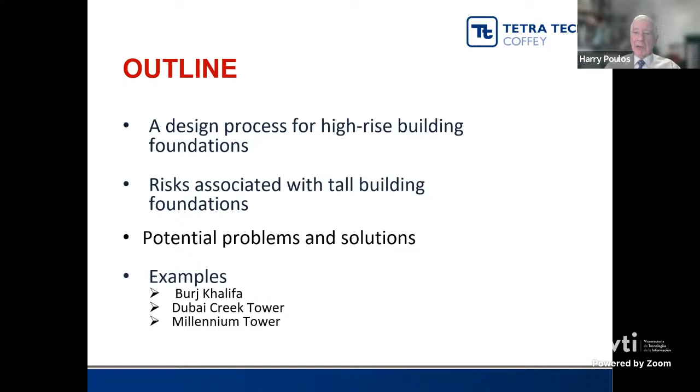The outline then is that I'll talk about the design process that we've developed. I'll talk about some of the risks associated with tall building foundations, some of the problems that we can encounter and how we can solve them. And then I'll talk fairly briefly about 3 examples: the Burj Khalifa, the Dubai Creek Tower, both of these in Dubai, and then the Millennium Tower in San Francisco.

Now, the number of tall buildings - this graph is from the Council on Tall Buildings and Urban Habitat. What it shows on the vertical axis is the number of tall buildings that have been completed, and on the horizontal axis are the years. You'll see there's been an almost consistent increase in the number of tall buildings. These are buildings, I guess, in excess of 300 meters, so these would be super tall buildings.

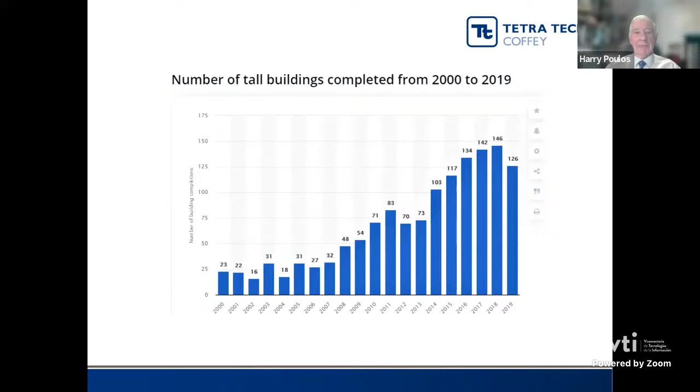There was a slight dip in 2019, but the number of tall buildings continues to increase significantly. Some aspects related to tall buildings are high vertical loads, which tend to increase non-linearly with height, because the taller the building, the more robust and heavy it has to be. We normally also have low-rise podium areas adjacent to the tall tower, so there's potential for differential settlement between the tower and the low-rise area.

We have high lateral forces and moments, and those forces and moments are cyclic in nature. We also have to design for seismic forces due to earthquakes, which give rise to two types of forces: inertial forces, caused by the building moving backwards and forwards, and kinematic forces, induced in the foundation system because the ground is moving backwards and forwards and impacting on the foundation system.

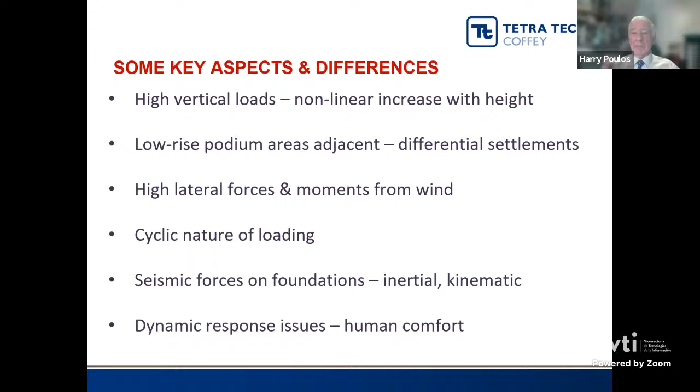We also have to make sure we design for human comfort, so we have to design the dynamic response of the structure-foundation system so that you don't have excessive movement and vibration. Now, here are some interesting aspects that make tall buildings different.

In recent times, there's been a tendency for taller towers to be located on smaller footprints. We now have a number of buildings where the aspect ratio, the ratio of height to width, is in excess of 20, whereas normally it would be 8 to 10. This has given rise to big issues with respect to lateral and overturning stability of the foundation system.

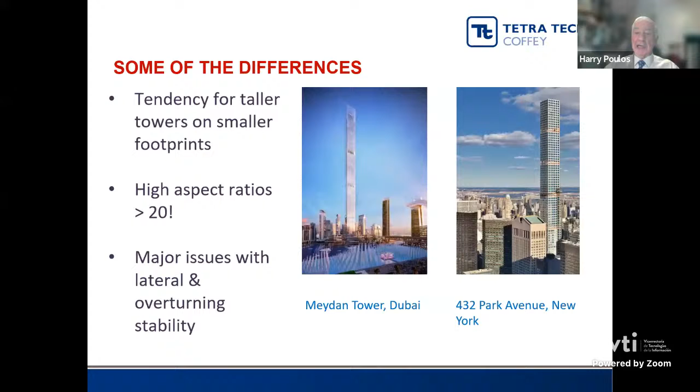The consequences of these differences between tall buildings and other foundations are that uneven settlements can be very visible, and the consequences of failure can be catastrophic. For these reasons and others, we need detailed ground investigations. Usually there are a large number of piles or barrettes involved. Load testing really needs to be done, and fortunately is now becoming quite common with major projects, and peer review is now much more common than it used to be.

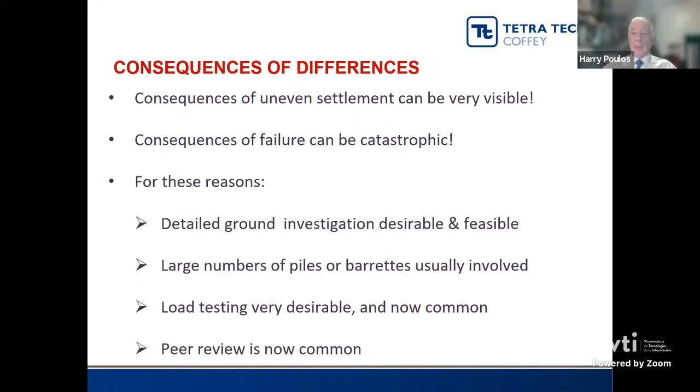Some of the ingredients for economic foundations: firstly, we have to have the right concept for the structure and the ground conditions. We have to have the right design criteria and methods of design, appropriate ground data and design parameters, quality construction, appropriate pile or foundation element testing, and ideally we need to monitor the performance of the building during and after construction so we can satisfy ourselves that what has been constructed is in accordance with our design intent.

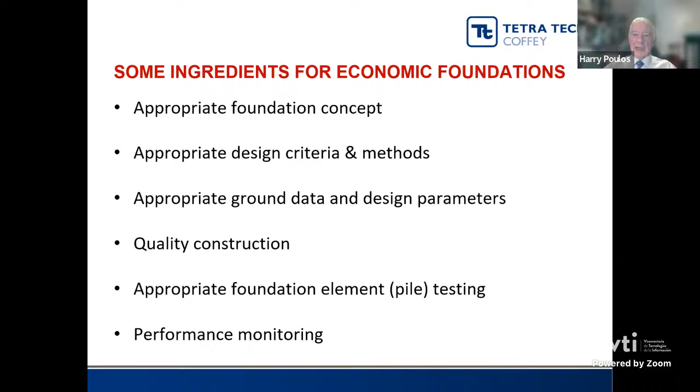We normally have three types of foundations used for tall buildings: the raft or mat foundation, suitable for buildings on good quality rock and perhaps not too tall; most tall buildings are on some form of pile foundation, either fully piled, where the piles take all the load, or, in more recent decades, the piled raft foundation, where it's recognized that the raft or basement slab can provide stiffness and resistance. This can enable us to reduce the number of piles and assist in the sustainability of the foundation system.

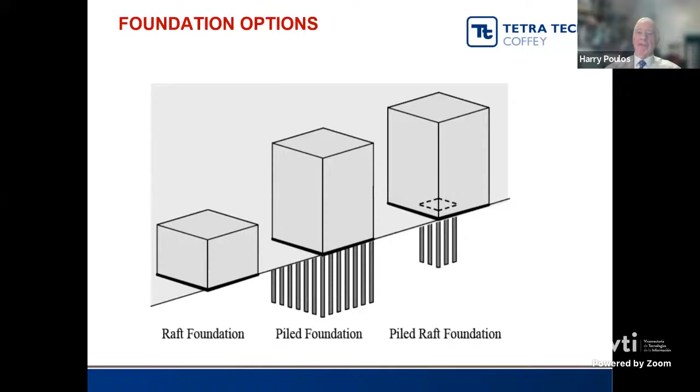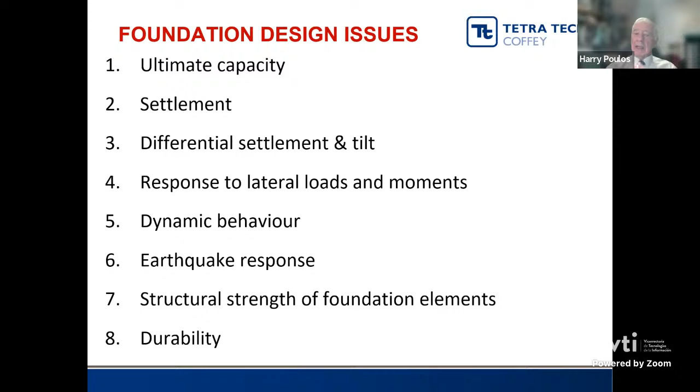The foundation design criteria we have to check for: ultimate capacity of the foundation system, settlement and differential settlement and tilt of the building, response to lateral loads and moments, dynamic behavior and earthquake response. These are geotechnical issues, but we must also be aware the foundation system has to be designed for adequate structural strength and durability. These days it's not uncommon for specifications to require the foundation system be durable for at least 100 years.

In the design process we adopt, we have three stages. The preliminary stage, the earliest stage, where we develop the foundation concept and decide the optimum type of foundation, whether a piled raft or a pile. Then we go into a detailed stage where we develop and optimize the design, and importantly interact closely with structural engineers. Then in the final stage, we do the final design, hopefully with the aid of load test data, so we can optimize and finalize our designs.

Here we also incorporate peer review considerations into that final stage. And I've got a note that the design tools we use should be consistent with the stage of design.

In other words, it's not sensible in the preliminary stage to start off the process using three-dimensional finite elements.

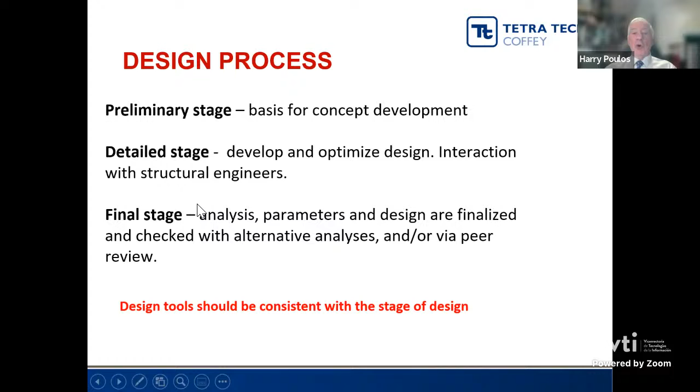Because normally we don't have enough detail of what our final foundation concept will be, nor do we generally have all the geotechnical data that you would require for a detailed analysis. That normally comes in the final stage.

So the analyses that we do then include ultimate limit state analyses, where we examine the overall stability and geotechnical capacity.

We also normally allow for cyclic loading analyses because we recognize that if there is an adequate or a large amount of cyclic loading, there is a potential for the reduction of skin friction of the piles.

And what we try to do is design the piles so that the cyclic loading will be no more than about 50% of the shaft friction capacity.

In terms of serviceability or allowable movements in settlements, typically we specify no more than 100 millimeters, although some buildings in Frankfurt, Germany have settled 150 millimeters or so without any damage.

And we try to limit the differential settlement or angular rotation to 1 in 500.

We have dynamic loading where there are requirements for human comfort, so you have vibration and frequency requirements.

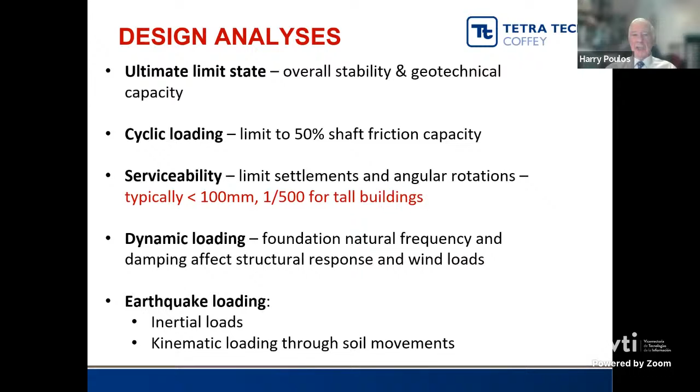And as I mentioned before, we also need to make sure that with earthquake loading, we take account of both the inertial loads due to the structure and kinematic loads through soil movements.

The geotechnical parameters, the main ones that we need to assess in our foundation design are, of course, the ultimate shaft friction and end bearing.

And if we've got a pile raft, we also need to know the ultimate bearing capacity of the raft. We need to estimate the soil stiffness or modulus for vertical loading.

Bearing in mind that for long-term dead and live loading, the modulus is generally smaller than it is for short-term loading, such as wind or seismic loading.

It's important that we distinguish between those two when looking at long-term settlements versus short-term movements due to wind loading. We need to estimate the ultimate lateral pressure so we can design the piles for lateral loading.

We also need soil stiffness or modulus values for lateral loading because they will generally be different from those for vertical loading.

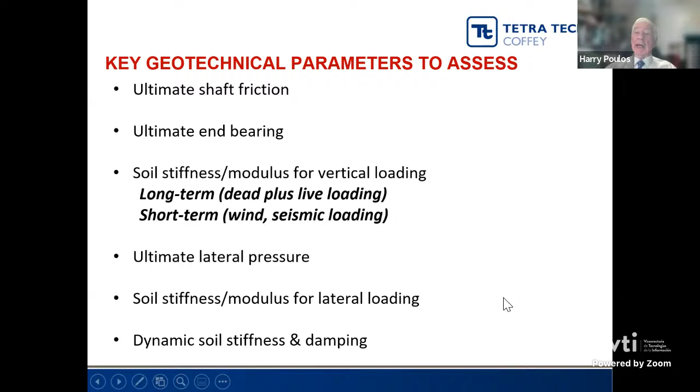And we also need to estimate dynamic soil stiffness and damping of the soil in which the foundation is located. There are a number of soil structure interaction issues.

When we do our stability calculations, we of course need to check firstly that the geotechnical resistance is adequate.

What we do here is factor down our estimated geotechnical capacity so that we make sure the factored down geotechnical capacity exceeds or equals the factored up loadings.

But we don't factor down our geotechnical resistances when we check for the structural loads in the foundation system, because that would artificially limit the amount of load that the piles can take.

We need to be aware that the stiffness of the superstructure will affect the settlement and differential settlement. This is best taken into account in the structural analysis using values of the stiffness of the piles and the raft, which we provide to the structural engineer.

Some of the software that is available commercially assumes that you have a rigid raft. That isn't always a good assumption for tall buildings, particularly buildings that are 50 or 60 meters in extent.

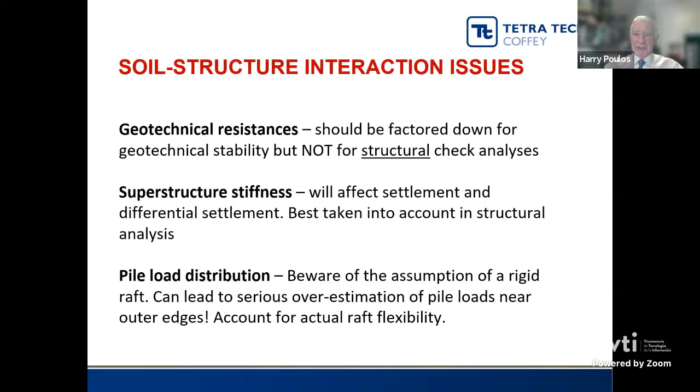Because even fairly thick rafts, as I'll show you later, can be relatively flexible over those sorts of distances.

It's important then that we have cooperation between structural and geotechnical designers. That is essential for a successful outcome.

One of the key geotechnical outputs that we as geotechnical designers provide to the structural engineer are values of the pile stiffness, the axial, lateral, and rotational stiffness for each pile within the group.

These stiffness values must take into account the fact that you have interaction between the piles in the group, and that affects the stiffness of the piles as compared with a single isolated pile.

Those values that we provide to our structural designers are then incorporated into their analysis to obtain structural design actions or loads.

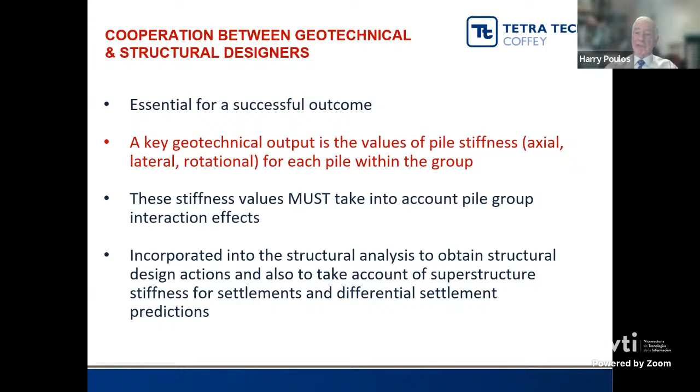And that takes into account also the effects of superstructure stiffness and allows us to get a more accurate assessment of settlements and differential settlements. So that's the design process.

Now, in reality, we have a number of risk factors in foundation design. It's possible, and has unfortunately been the case in many past projects, that we do inadequate investigation, and so we finish up with an inappropriate ground model.

We also may have to contend with the reality that geology provides what I call imperfections. These are non-ideal conditions. For example, we may have a softer layer below the tips of the piles. We may have sloping bedrock or uneven thickness of layers. We may have boulders. And then in terms of the construction process itself, there may be problems or imperfections or deficiencies in that construction process.

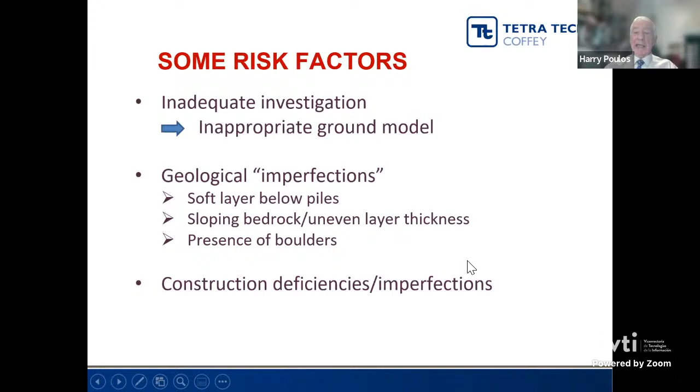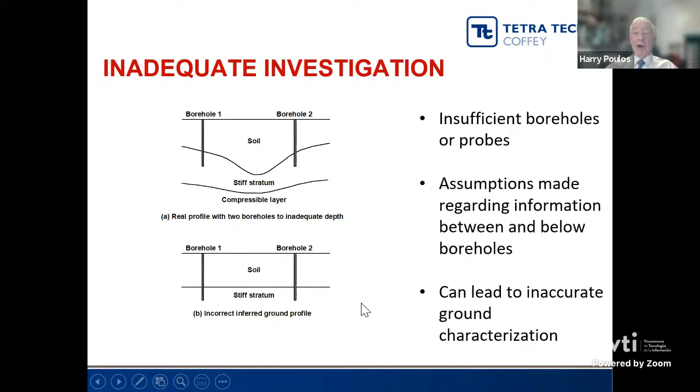So just very briefly to illustrate some of these risk factors, here's a hypothetical situation where we put down two boreholes and we think that those boreholes show that there is a horizontal soil layer with a stiff stratum underneath. But what we miss here are two important factors. One is that there may have been an old riverbed in between, and so we miss that out. And if our boreholes don't go deep enough, we miss the fact that there is a compressible stratum below that stiff stratum. So that can lead to a very simplified and incorrect ground profile, which can in turn lead to problems with our foundation. We'll talk about that towards the end of the lecture.

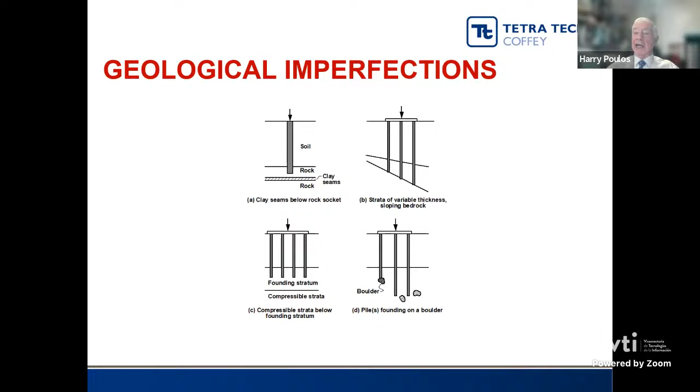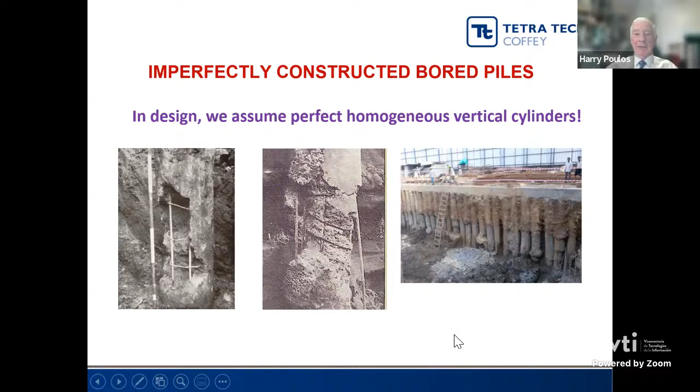And of course, we can have imperfect construction. Here are some unfortunate examples of bored piles, which are very imperfect, as you can see. And here are piles that are not very attractive because they're not what we assume in design, which is, in design, we assume that the piles are perfectly homogeneous vertical cylinders. And in reality, that is certainly not the case here.

So what are the consequences of those imperfections? Well, in terms of the design issues, if we've got a situation where we have uneven settlements, we need to try and correct the settlements to reduce the differential settlements. And we have two classes of methods, hard and soft methods. I'll describe those in a minute.

We then need to design remedial or enhancement works so that we increase the resistance of the foundation system. And we need to be aware of the load sharing between old and new elements.

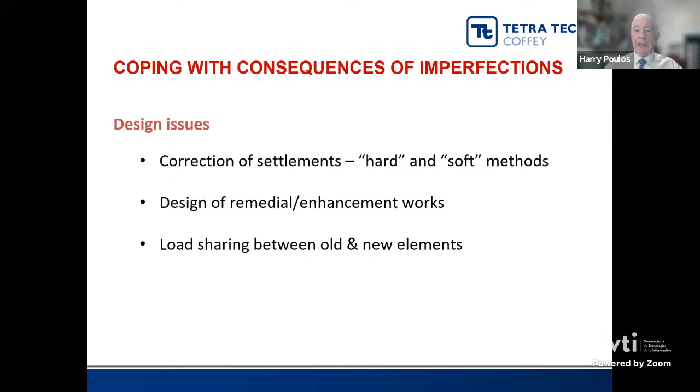Now, I mentioned methods of correcting uneven settlements. Here we have some of the hard methods. These are methods where we actually do put force on the foundation system or the building to try and correct the uneven settlement. We can use anchor stressing or additional loading on the high side to try and get the high side to settle more. We can try cutting the piles, but that generally isn't that effective, and it's a bit of a terrible process.

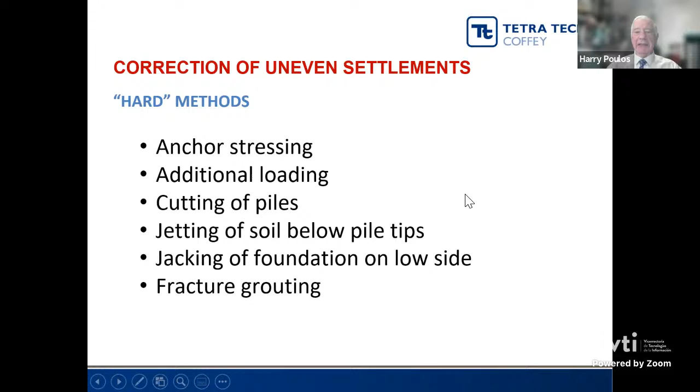We can try jetting the soil below the pile tips. We can try jacking the foundation on the low side to jack it up, but that isn't always effective, because as you jack up, you also, because of Newton's law, have a force that goes down, so that may not be effective. And also, one of the other methods that has been used is fracture grouting to try and jack up the low side, but that is also not a very controlled process.

We have then what I call the soft methods, which basically involve doing something to the soil rather than to the structure. So we have the possibility of doing soil extraction, so we remove some of the soil from the high side to try and induce extra settlement and so reduce the differential settlement.

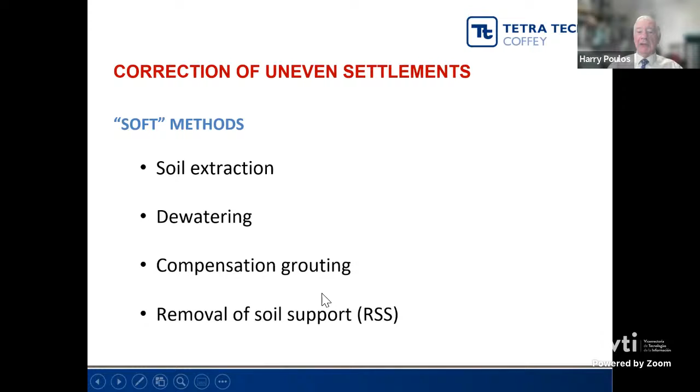We can, in principle, try dewatering, although that's not always a good idea. We can try compensation grouting so that we lift the soil on the low side, and we can also try what I call removal of soil support.

Just by way of illustration, these two diagrams show where soil extraction has been used in two cases, and there have been many more. Here in Iran, there was a grain elevator terminal that had settled unevenly. So what was done was they constructed a trench and put in horizontal saws to try and remove soil from the high side increasingly, doing a series of saw cuts to remove it and induce the high side to settle more, reducing the uneven settlement.

And this one on the right-hand side, the very famous Pisa Tower process, where a series of inclined boreholes, auger holes, was introduced under the high side of the tower, and soil was augered out. I think there were 43 boreholes in all, and that corrected the lean of the tower by about half a degree. Professor Burland, who's involved in that project, has estimated that will increase the life of the building by some 300 years.

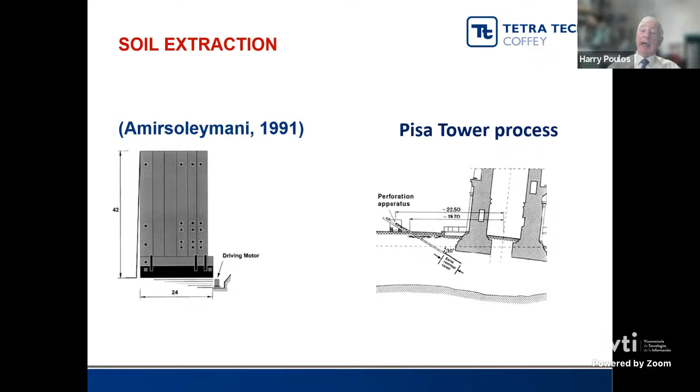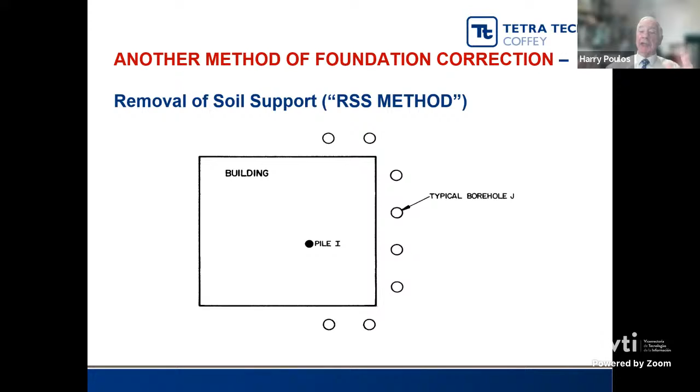And I mentioned the removal of soil support approach. This is a method that has been used in China, and we almost used it in Hong Kong for a tall building. It involves drilling a series of boreholes outside the footprint with the idea of trying to remove the soil support, and therefore cause some additional settlement on the high side of the building to reduce the tilt of the building.

In terms of enhancement works, we can try to repair the existing piles, but if you've got defective piles, that can be difficult. Normally, what we try to do is extend the pile caps to strengthen and stiffen the foundation, and then add new piles as well to try and get a more solid foundation system.

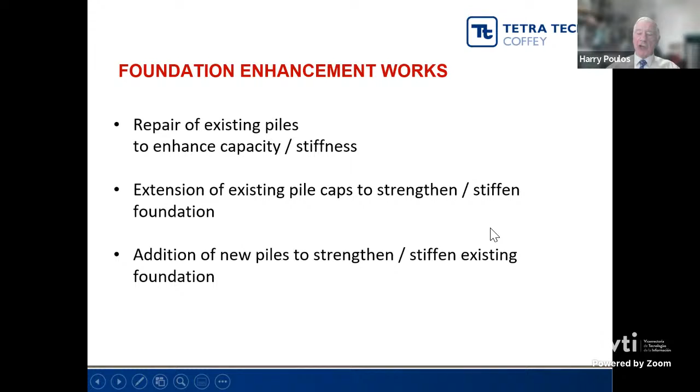We have to be very careful that when we do remedial work, we don't make the problem worse, because when you're installing piles, you inevitably cause ground movements, and those can affect the existing foundation system. That will also happen if you do excavation for the pile cap itself. In both cases, you're disturbing the ground under the high-rise building, which is now highly stressed, so the ground movements due to construction are much more severe than they would be in what we call a greenfield, or a level site with no building.

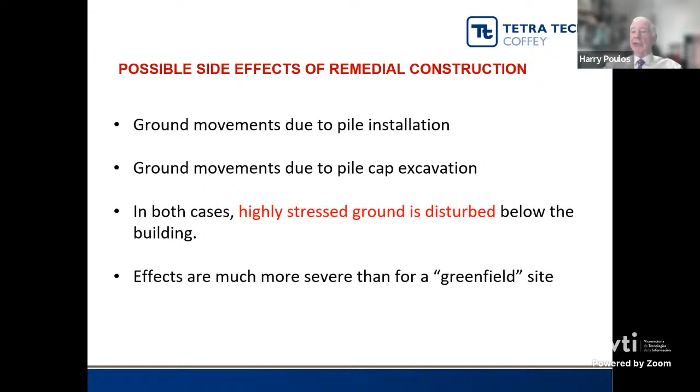What are the measures that we can take to reduce risks? I think certainly the first thing we can do is have an independent peer review of the ground investigation report, and then an independent peer review of the foundation design, independent supervision of foundation construction to try and avoid the problems of construction imperfections, and we need to be able to do foundation testing of the piles or barrettes.

We need to monitor the settlements during construction and compare what we measure with what we predict, because if there is a problem, the sooner we can detect it, the sooner we can start to fix it. We should treat these measures, they all involve money of course, as investments in insurance rather than as costs, because in the end, if you don't take these measures, the possible cost of fixing the problem can be very great.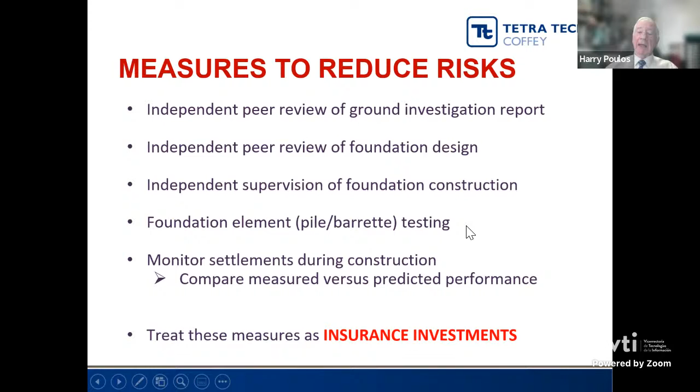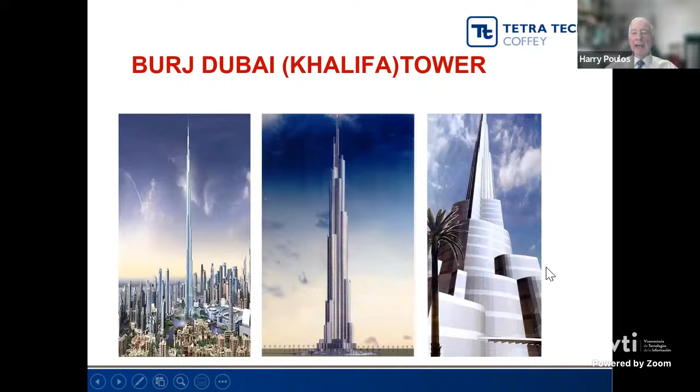So let me talk about the three case histories now that I have had some involvement with. The Burj Dubai, as it was originally called, or the Burj Khalifa in Dubai. These are the original architect's concepts, the drawings for them, and it was to be, and is still, the tallest building in the world. These are the challenges then, of the world's tallest building.

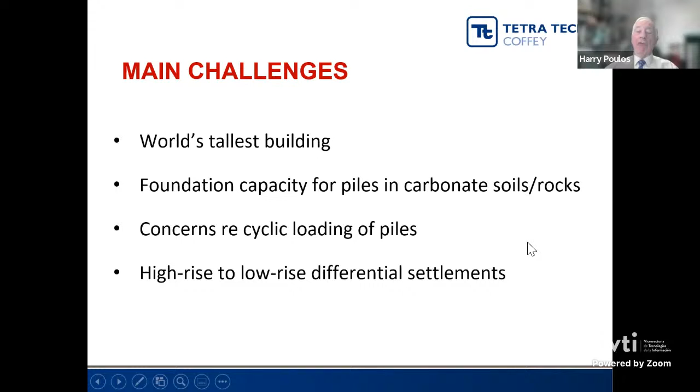The site characterization was fairly significant. There were 30 boreholes, SPTs done on the upper strata, pressure meter tests done in 5 boreholes, a lot of piezometers put in, and importantly, geophysics done using cross-hole tomography.

The geophysics there had two purposes. One was to give us profiles of shear wave velocity with depth so we could get other estimates of the stiffness of the ground. It was also a way of estimating and assessing the uniformity of ground conditions, because even with 30 boreholes there could be geological features that we miss, and geophysics can identify those sorts of geological problems if they exist.

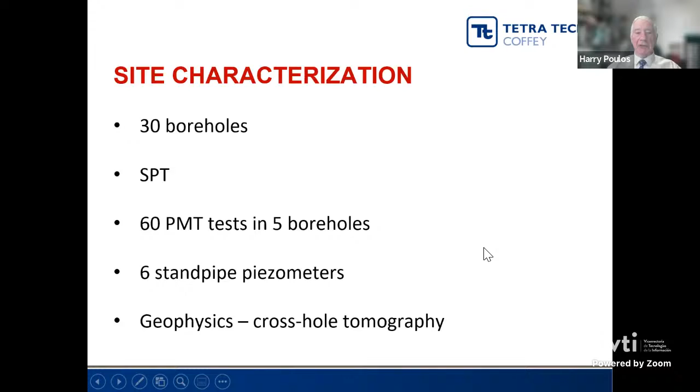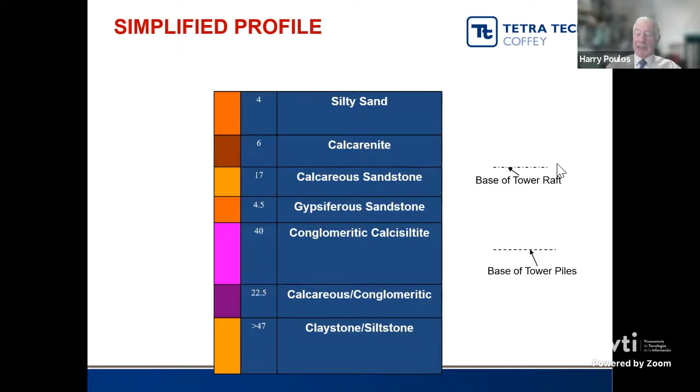In fact, the piles were not very long - they turned out to be 47.5 meters long. If you draw this to scale, the building itself is 828 meters, so you'll see that the foundation is about 5% the height of the building.

The initial pile design - I should say that we and Hyder worked very much in parallel rather than in series. We worked very closely at all stages, involved in the ground investigations, in assessing the ground model, and in doing the design. It wasn't a process where Hyder did their design and then passed it on to us - we did this jointly, and it was a very cooperative and satisfactory process.

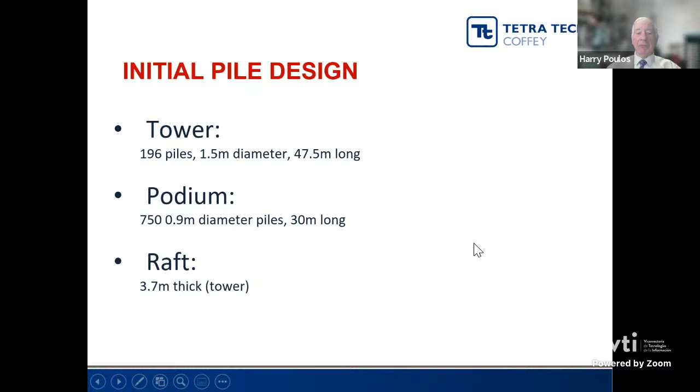Hyder and ourselves did independent calculations by various methods to estimate the settlement. It turned out the geotechnical capacity of the foundation system was not a problem - the controlling design element was the settlement and differential settlement. Hyder used a program called Repute and also a finite element program called Abaqus, and got somewhere between 66 and 72 millimeters. We at Coffey used 2 methods: FLAC, the finite difference program, got 73 millimeters, and we used one of our in-house programs called PIGS, Pile Group Settlement, and got a very similar result. Then subsequently, we did a very simple calculation using an equivalent pier for the foundation and got an almost identical result. So different methods by different designers got very similar results, somewhere between 65 and 75 millimeters for the estimated maximum settlement, and that was within the design specifications.

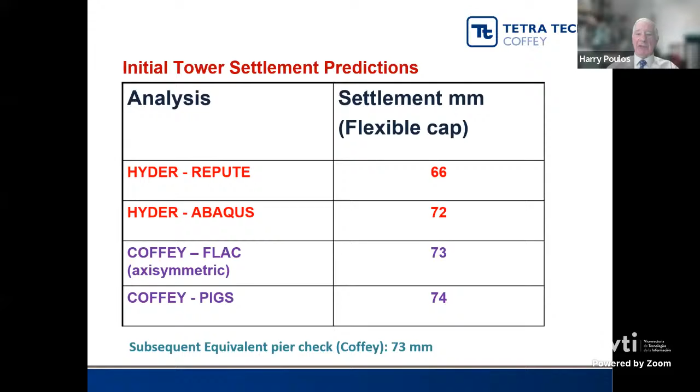Now, of course, it's essential in a project like this to do load testing to verify the design assumptions. There was a load test program which involved 3 static compression tests done on 1.5 meter diameter piles with toe levels 35, 45, and 55 meters long, just to see whether we could economize on the 47.5 meters we had originally designed. We did 1 static compression test where we shaft-grouted the piles to see whether that would increase the shaft friction. We did a cyclic compression test on a smaller pile to check performance under cyclic loading. We did a static tension test for the smaller piles, and we also did a lateral load test.

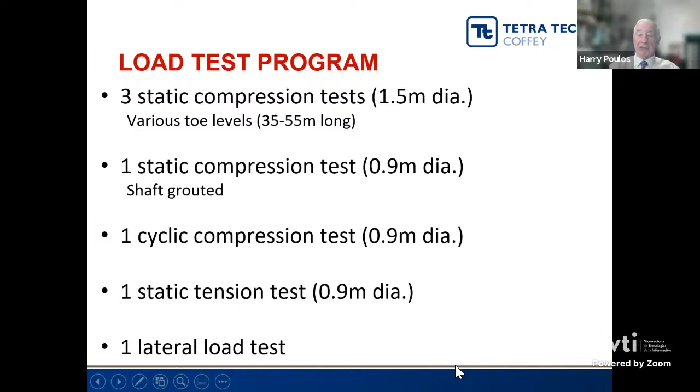The outcomes of this load test program were very favorable. We found that the 1.5 meter piles were loaded to twice working load, the smaller piles to 3.5 times working load, and none of those piles appeared to be approaching failure, so they had more than adequate capacity. The skin friction values were actually in excess of our design assumptions, so that was good.

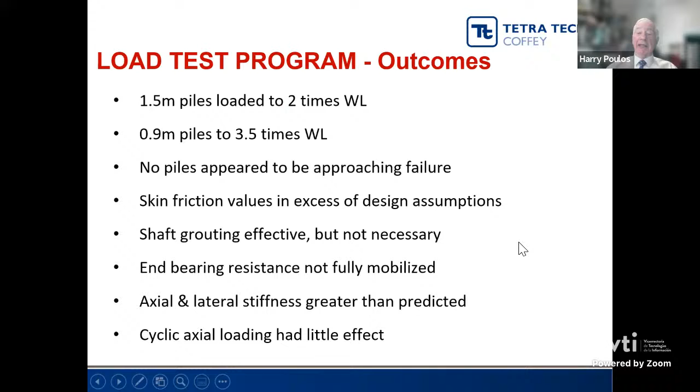The shaft grouting was found to be effective but not necessary because we had adequate skin friction without the shaft grouting. The end bearing resistance wasn't fully mobilized because we couldn't get enough load into the piles to generate the full end bearing. The axial and lateral stiffness values were greater than predicted, and fortunately we found that the cyclic axial loading had little effect. So all of that was very positive.

Now, during the construction, settlement readings were taken at the foundation base level, and these are the measured settlement contours when the building was at about 80% of its final height. And what happened here was that the good news is that the settlements were very symmetrical, that the maximum settlement was in the center and minimum settlements on the outside.

And there were significant differential settlements between the center and the outside, maybe of the order of 10 to 12 millimeters, even though this raft was 3.7 meters thick, quite a thick raft. But because the building itself is about 55 meters in lateral extent, you still get bending of the foundation raft.

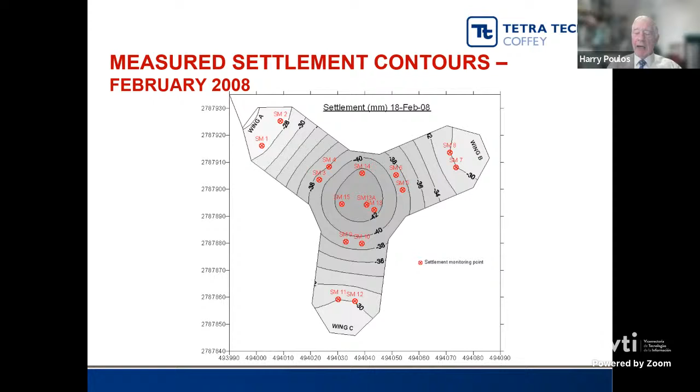Here are time settlement records. On the horizontal axis, the distance along one of the cross sections, and then the settlement here at various times. The upper diagrams show the measured settlements at different times during construction. This last one was at about 80% of the dead load, which was about 43 millimeter settlement. And this is our estimated, the design estimated final profile, which showed about 75 millimeters maximum.

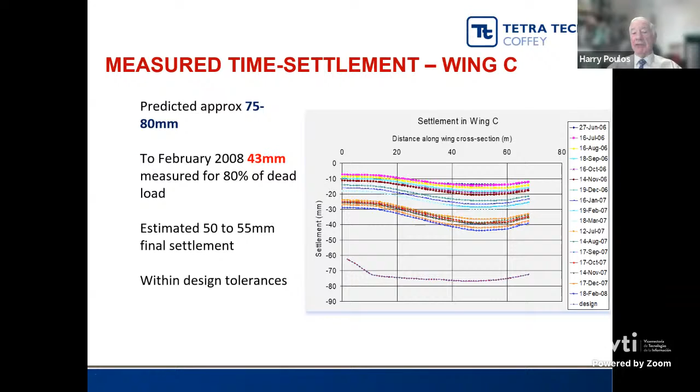And we estimated on that basis that the final settlement would be of the order of 50 to 55 millimeters long term, which was, I guess, reasonably comfortable and certainly within design tolerances. So we were a little conservative in our assessment of settlement, but quite comfortably so.

And just to give you some perspective, the structural designers estimated how much the building would shorten because of elastic shortening, also shrinkage and creep of the concrete. Now, what they found was, or what they estimated, was that the top of the building could shrink by as much as 300 millimeters. So our settlement of the order of 50 millimeters is actually significantly less than the structural shortening of the building.

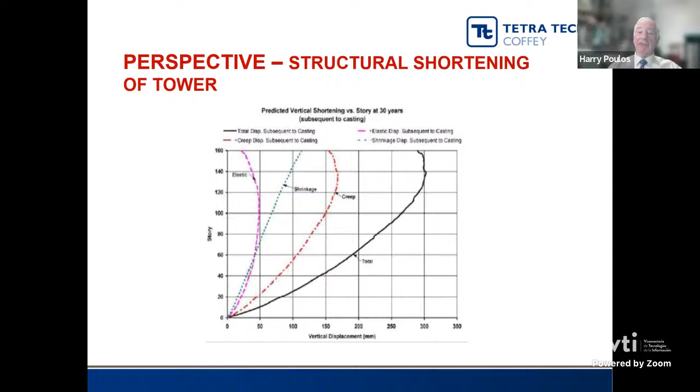So here are three pictures of the building as it's being constructed early in 2006 when it's up around 10 or 15 floors, early 2007 when it's getting towards the top, and the grand opening where it was renamed the Burj Khalifa from the Burj Dubai, which happened very early in 2010.

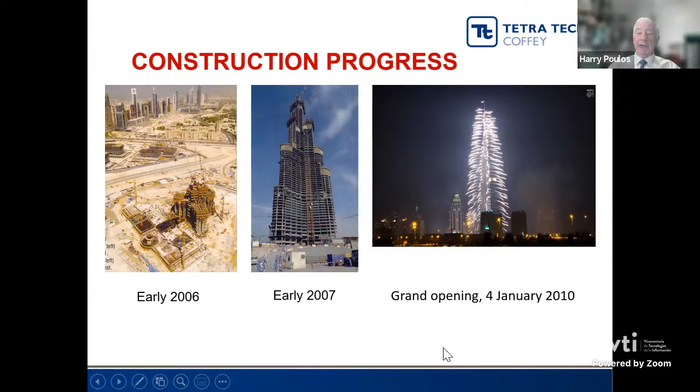The next project I'll mention very briefly is also in Dubai, and this is the Dubai Creek Tower. It's a very new development in Dubai, about 8 or 10 kilometers inland from the Burj Khalifa, on what is really a big desert area. The concept here is that there will be a whole series of high-rise towers with the centerpiece, the Dubai Creek Tower, being in excess of 1,000 meters. And it will not be a residential tower, but an observation tower and a tourist attraction.

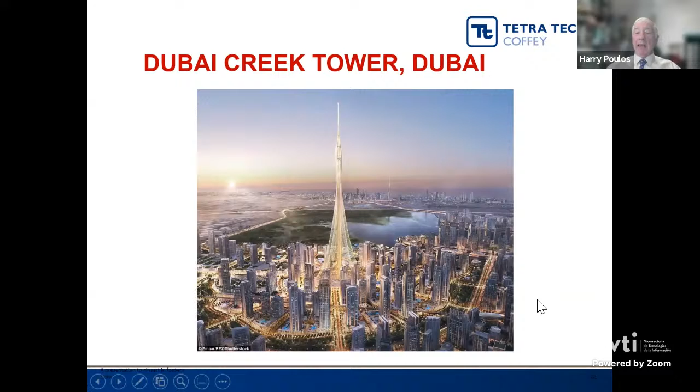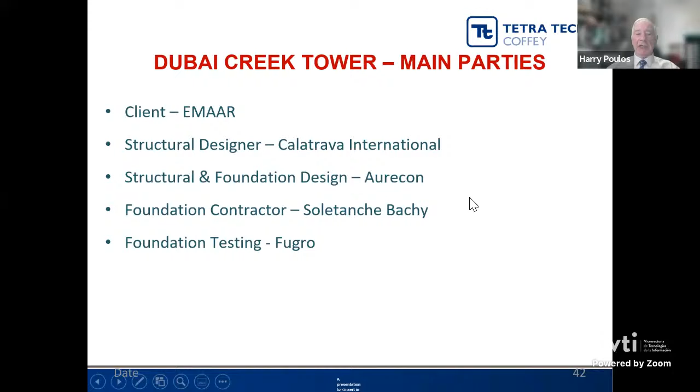The people involved here were EMAAR, who was the client. The structural designer was Calatrava International. The foundation design was done by Aurecon in South Africa. The foundation contractor was Soletanche Bachy. The testing of foundations was Fugro, and I was assisting Aurecon with the foundation design.

Now, the main challenges here, again, we were dealing with what will be one of the world's next tallest structures. Fast track construction was required. Again, we had carbonate soils and rocks, so there were capacity issues, but we also had extremely large lateral and vertical loads on this structure.

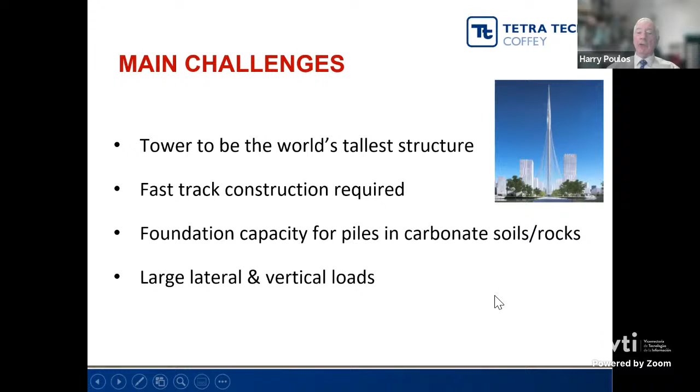The challenges were met here by intensive ground investigation. A lot of boreholes were done here, more than the Burj Khalifa, because this was somewhat more extensive in area. High quality in situ and laboratory testing was done. High-level design analyses were carried out by Aurecon, the designers. There were a series of design workshops, and there was also a major load testing program.

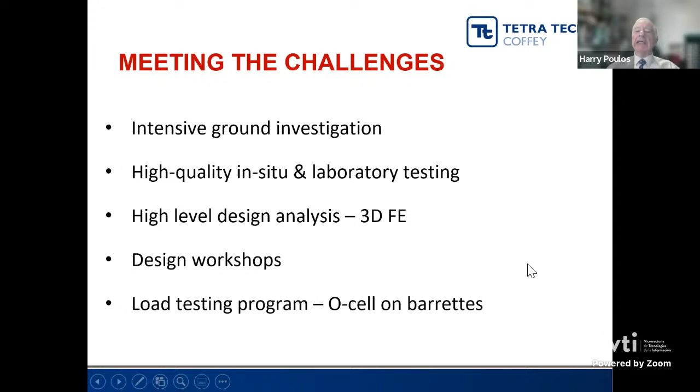The foundation system itself consisted not of piles, but of barrettes. These are basically rectangular piles, 1.2 meters by, I think, either 2.8 or in some cases 6.2 meters wide. So very large rectangular piles. This is the foundation solution - below the main tower there were 145 barrettes, about 72 meters long. So you see, these are very large foundation elements.

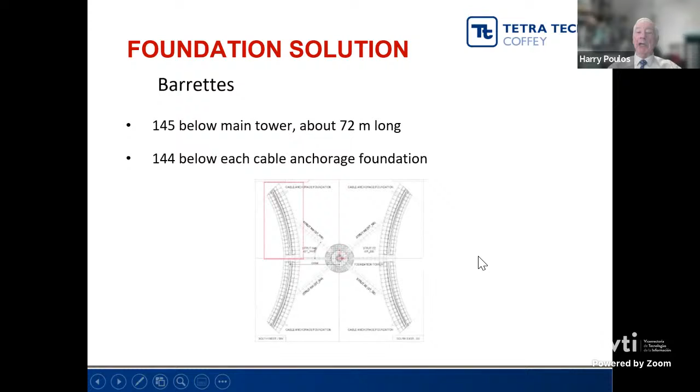And on the outsides, anchoring the cables that you saw initially, under each one of these was 144 barrettes for the cable anchorages. And so these are the reinforcing cages for the barrettes, and this is the barrette installation. And this is an aerial picture of the foundation construction.

There was a wall constructed around the tower area, some 10 meters deep, a diaphragm wall, and within that there were the barrettes that were installed for the foundation system.

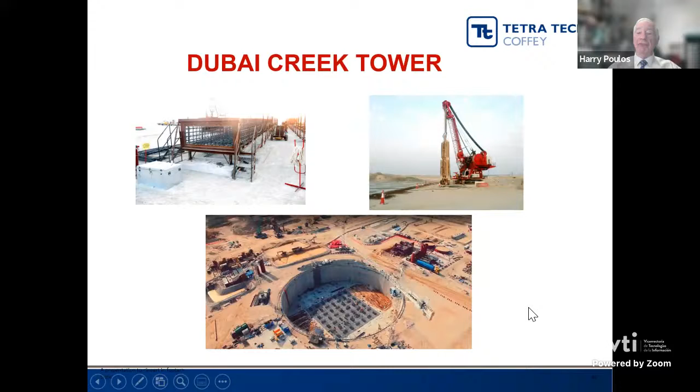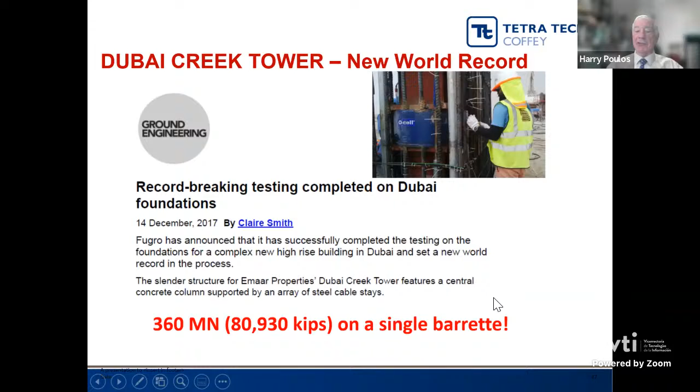One of the interesting things was that with the load testing carried out on the barrettes here, a new world record was actually set for the load applied to a single barrette, which is 360 meganewtons, nearly 36,000 tons on a single unit. That is an enormous load.

Now, unfortunately, that project has stalled. It has started, but it hasn't really been completed for various financial and other reasons, and I guess the COVID epidemic also contributed to that delay. But if and when it is completed, it will be, I believe, in excess of 1,300 meters. So it will really be quite a landmark tower.

Now, those two projects have a number of positive elements. There was detailed ground investigation, including geophysics. There were advanced design methods used. There was a cooperative peer review process. There was detailed load testing. And certainly in the case of the Burj Khalifa, subsequent settlement monitoring, and that will be the case also with the Dubai Creek Tower.

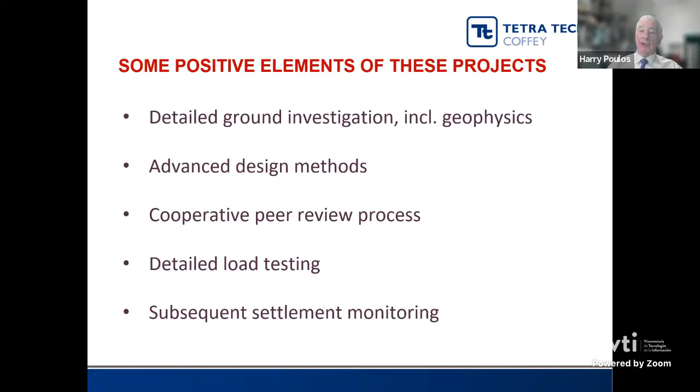Now let me conclude with a less favorable story. This is the Millennium Tower in San Francisco. My involvement with this was very peripheral. I was not involved in the design. I was asked some questions by legal and media outlets about this design, so I know a little bit, but not a great deal.

This tower is 184 meters tall and 58 stories high. It's the tallest residential tower in San Francisco, and it is home to many very wealthy and influential people. It was founded on 945 reinforced concrete piles that were founded not on rock, as many tall buildings in San Francisco are, but on a dense sand layer, and the piles were only about 24 meters long. Underneath the sand supporting those piles was quite a thick layer of clay.

Now, there were also, over the period of existence of this building, about 10 years, a lot of construction activities involving excavation and dewatering. The maximum settlement of this building was found to be in excess of 450 millimeters, with a maximum differential settlement of 100 millimeters or more, and quite a significant tilt. The residents noted that things kept falling off the table or rolling on the floor because of that differential settlement.

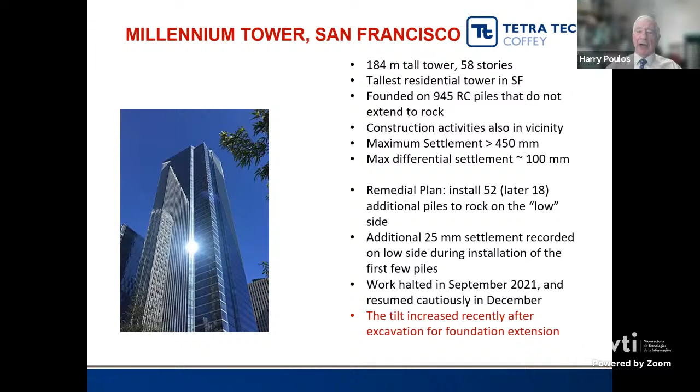Work was halted in September last year. It was resumed, I think cautiously, in December, but the tilt has continued to increase after the excavation for the foundation extension. So at the moment, I'm not quite sure where this building stands, but it's a very unfortunate situation, and I'm afraid that perhaps in hindsight, some of these problems could have been avoided.

For example, the problems included the fact that the initial foundation design was what I call non-optimal, in that it should have been recognized that for such a tall building, the underlying clay layers would be influential. There were nearby construction activities that caused ground disturbance. I don't think there was detailed monitoring of the settlements during construction, but there was after.

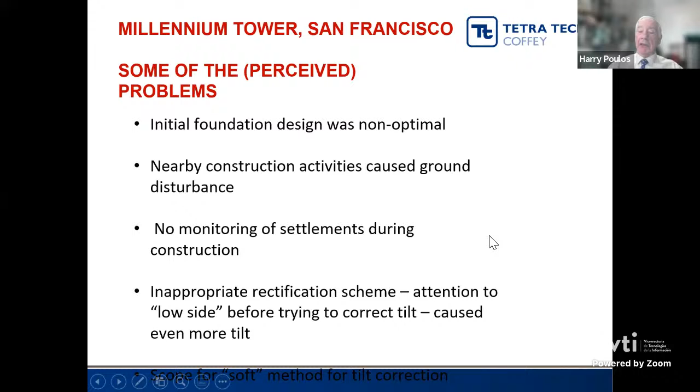And there was an inappropriate rectification scheme, with attention devoted firstly to the low side before trying to correct the tilt. They perhaps should have started to correct the tilt on the high side that had settled less, before they tried to correct the stiffness on the low side. And so that scheme caused even more tilt.

So just in conclusion, what I've tried to indicate is that there are three sets of analyses that we generally do in the approach that we adopt: an overall stability analysis, a serviceability analysis, and analysis for structural design. We also take account of cyclic loading effects to try to limit the loading on the piles so that we don't get cyclic degradation of skin friction.

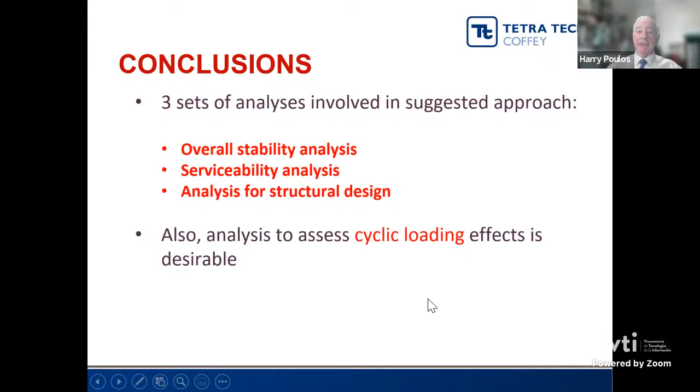We are able, I think, these days to meet the challenges of tall building foundation design because we have modern methods being used for in situ testing, laboratory testing, analysis and design methods, and load testing.

And in particular now with the Osterberg cell method being so widely used, we are able to get much better estimates of the performance of deep and very large capacity foundations. We, however, must always use simpler methods to check on advanced numerical analyses because some of these methods are in some ways black boxes to the users, and if you don't fully understand the limitations of the analyses, you may come up with answers that are not appropriate. So you must always have some means of checking the results.

We need to have cooperation between geotechnical and structural designers, and we need to be aware of the possible sources of problems in investigation, in design, and in construction. And finally, some of the precautionary measures that I've mentioned earlier should be taken into account to reduce the risks involved in the design and construction of high-rise building foundations. Thank you.